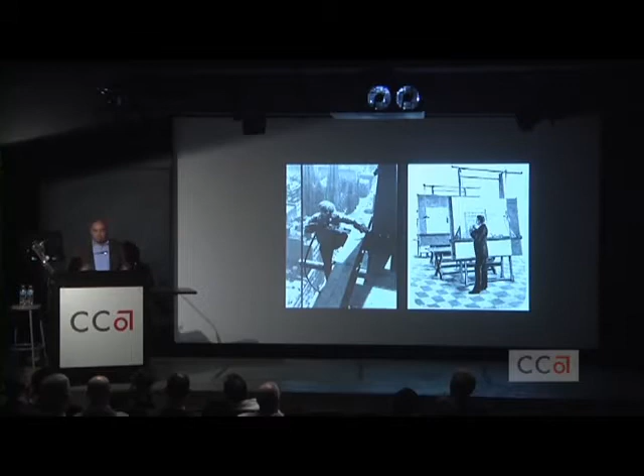This, of course, was not always the case. Throughout ancient and medieval history, most architectural design and construction was actually carried out by artisans, typically masons or carpenters. Until modern times, there was no clear distinction between an architect, a builder, or even an engineer. In fact, in Europe, those titles were mainly geographical variations that often described exactly the same person. And in fact, nowadays in Germany, where I worked and taught for many years, architecture students and engineering students actually graduate with the exact same title, Diplom-Ingenieur.

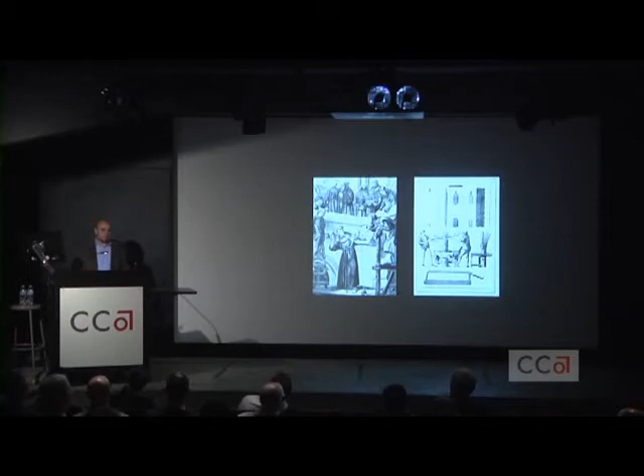So architecture students and engineering students can actually take classes with each other. I taught, for example, design studio to many structural engineering students. In the US, however, a typical architecture school will include within its programs architecture, interior design or interior architecture, landscape architecture, urban planning, but they will also distinguish themselves from other professions that have more to do with materiality, such as structural engineering or material science.

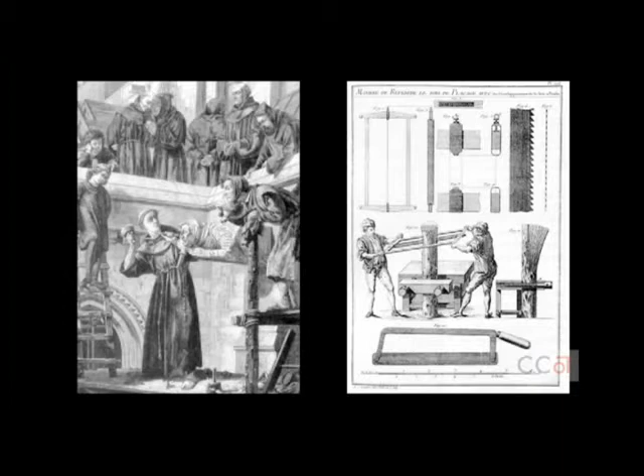I find it really interesting that when I came here a year ago, a little bit longer, I realized that here at CCA we have a lot of MFA students, sculpture students. We also have furniture design students. In their case, that clear distinction, that separation is not that strong. Because of scale, sculpture students and furniture design students actually have the chance to design by making. They design by being in direct contact with building materials, which I think gives them an advantage in the way they work.

After all, the word architect really comes from the Greek architekton, which really means chief builder. So it's not chief speculator or chief philosopher, it's really chief builder. At least that's what the name is supposed to mean.

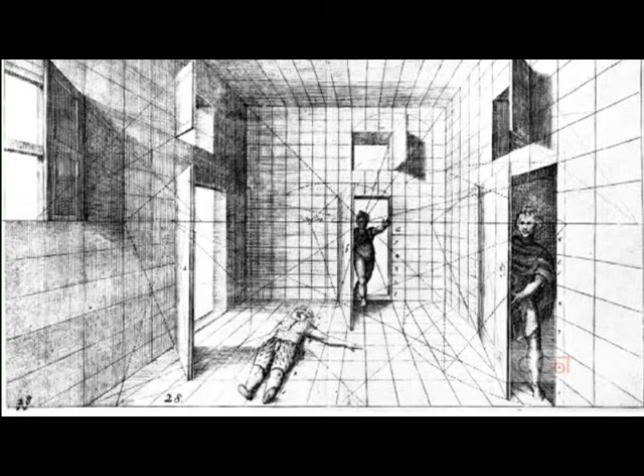So how did this distinction between a professional designer, an intellectual designer, versus somebody who's a craftsman, who is hands-on, come to be? Well, I'm not a historian, but it seems like people agree that various developments in technology, such as introduction of linear perspective, instruments for drawing, and the use of projection techniques to describe a three-dimensional object in two dimensions, allowed for this to happen. So all of a sudden, architects could spend their time just drawing and planning and speculating without necessarily ever having to interact with the physical world. And of course, this allowed the discipline of architecture to broaden up and include other concepts previously believed to belong to the realms of art, history, or philosophy, which is absolutely fantastic, don't get me wrong, it's truly liberating.

But I will argue that in architecture school and in architecture in general, some people tend to believe that technical questions can actually limit creative freedom. Some architecture students tend to think about technical issues such as structural stability, manufacturing processes, building materials, or detailing as problems that need to be solved after the main concept of a design is already established.

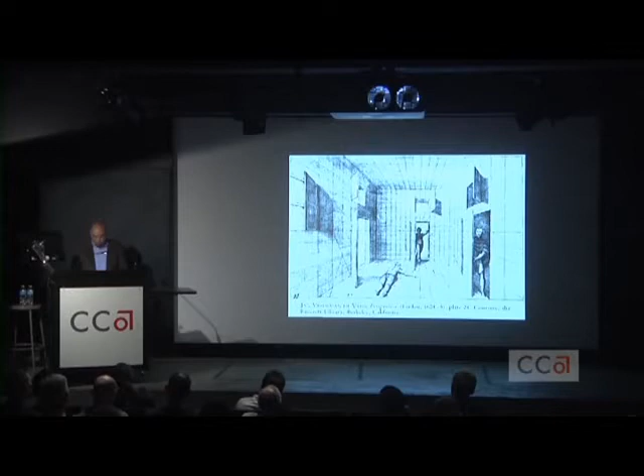So my teaching and professional philosophy is basically based on the premise that materiality and creativity do not have to be mutually exclusive, but should in fact support and reinforce each other. Understanding the potential and limitations of construction materials, being responsible for the structural stability of a design, and being familiar with contemporary manufacturing and installation processes are in themselves abundant sources of creativity, and should be an integral part of the design process.

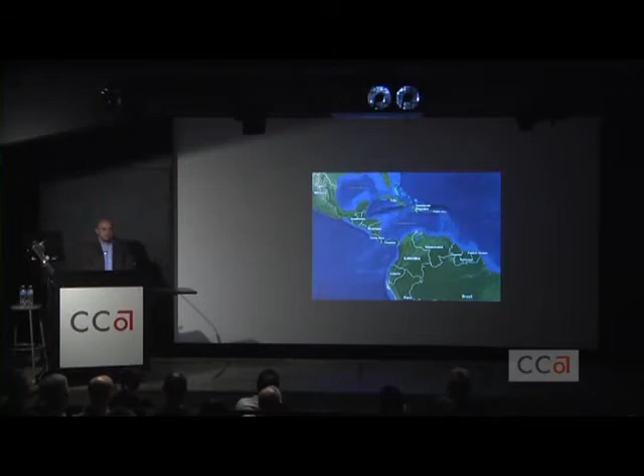So I have tried to explore all these issues in my career, all the way since I was a student, now as a professional architect and also as an educator. So the first project I want to show you is my undergrad thesis that I did already 15 years ago when I was back in Venezuela in 1999.

So I was born in a small city called Merida. I got these laser pointers so I can show you on the map. You have here Panama, Venezuela, Colombia, and the Andes, this big series of mountains going this way, all the way from Ecuador, Colombia, and then continuing. When the mountains get here, they're not that high, but still about 16,000, 15,000 feet.

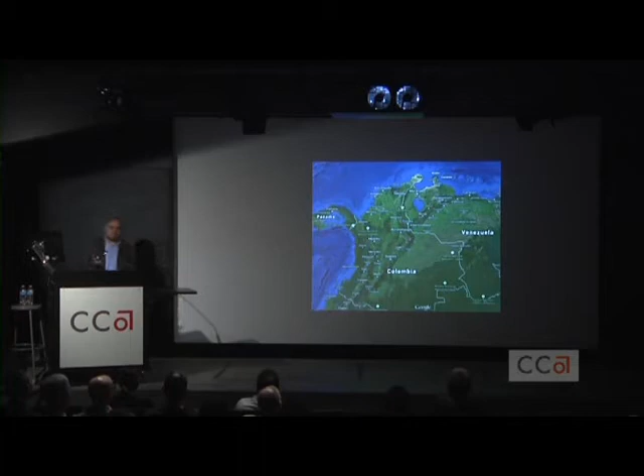There's only a couple of streets that go in this direction, and the university, where I went to undergrad, is in the north part of the city, while everybody lives in the south part. So the traffic jams are terrible.

At the time, the idea was to propose some kind of public transportation system. What was proposed was to use the valley of the Albarregas River to design some kind of high line or elevated train system, like a subway. So I decided to design one of the train stations, and that was my undergraduate thesis.

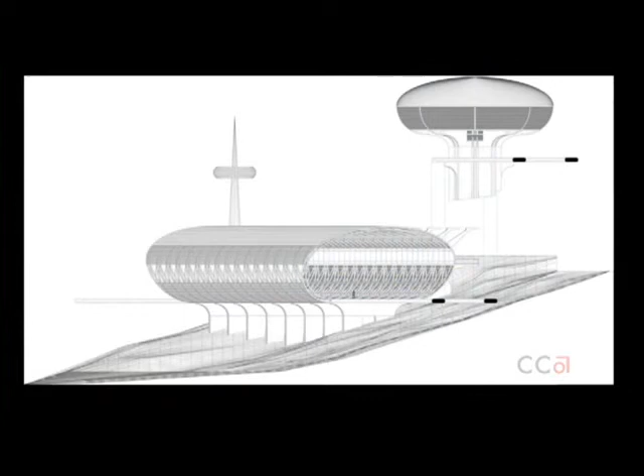It's very simple. It was basically a tube with a series of elements. This was basically a parking structure. And as you can see here, the quality of the space was based on the expression of the construction materials, on the expression of the structure.

At the time, back in 1999, Venezuela was a kind of world-class exporter of steel and aluminum, and it was thought that the extensive use of this building material could create in Venezuelans a sense of national pride and try to bring the economy up.

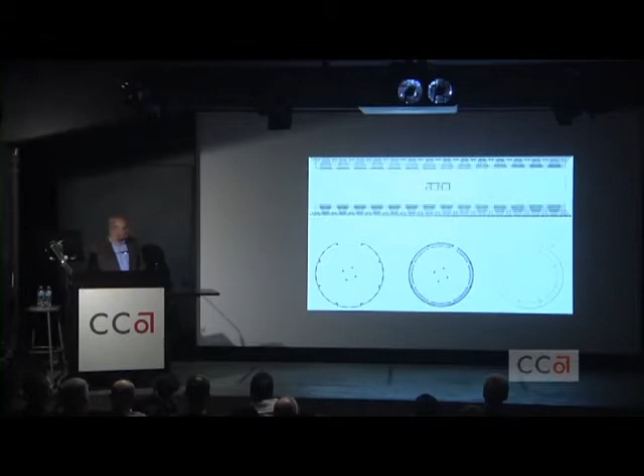Here we see an elevation and a section, and here a couple of plan views. This is the platform level, and as you can see, the rails depict one of these elevated magnetic train systems. So I was really pushing the technology aspect.

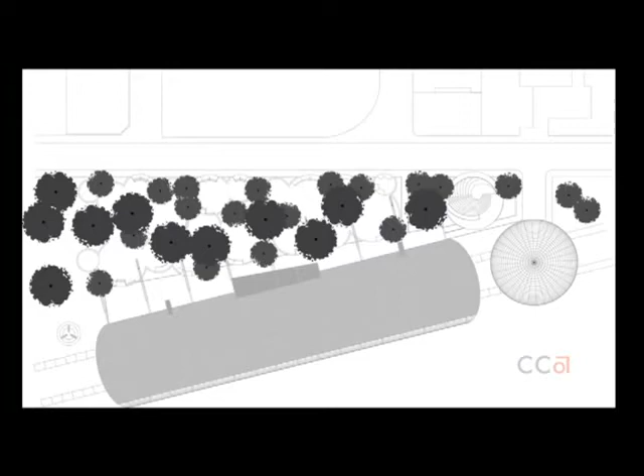Something that was very important for me is that the whole area, all the valley of the river, was extensively covered with a lot of tropical vegetation. So on plan view, this is basically the street level. It was important for me to separate the station from the street and map the position of every large tree, generating between the platform and the street a series of access piazzas that were also shaded by the local trees.

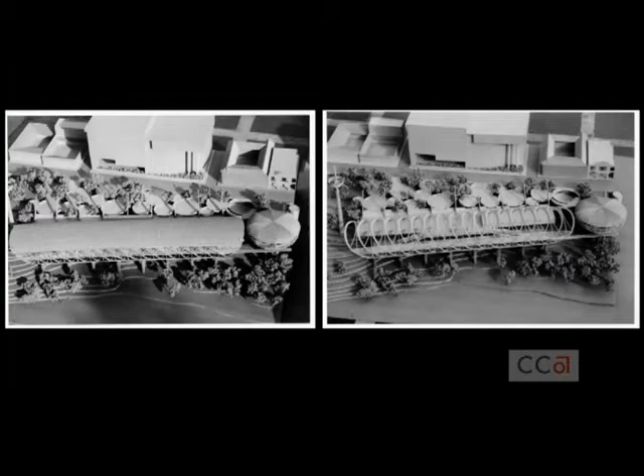So this is the physical model that I created. You can see the piazzas here and here. This was all done before laser cutters, so it took a long time to cut all of these pieces by hand.

In 1999, after graduation, I had the chance to work at a local tensile membrane structures and transformable structures office called Grupo Estrana, in Caracas. Before I went to pursue graduate studies at the University of Michigan, I decided to work there. One of the projects I was involved in was called the Estran module, a deployable structure designed to rapidly provide shelter to areas affected by natural disasters. That was the main idea.

And also exposition spaces, temporary deposits, outdoor gathering spaces, and any other space that required being rapidly covered or protected. The whole thing weighed about 2,000 pounds. It was made of aluminum and covered an area of about 2,100 square feet. The nice thing is when it was closed, when it was collapsed, the dimensions were about

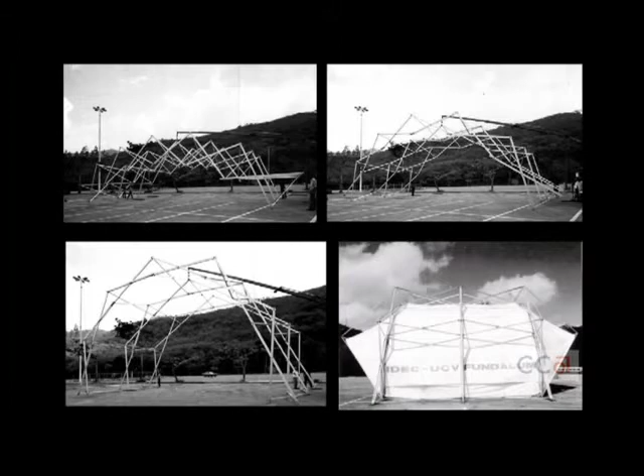And then once it's locked into position, the membrane is installed. So we did this and we realized, well, this is great, but if this structure is supposed to be servicing remote areas after, let's say, an earthquake or something like this, the question is, well, what if you cannot get the crane in? So what we did is we designed a very simple kind of a series of skates with wheels, to basically be able to hopefully install this thing without any cranes.

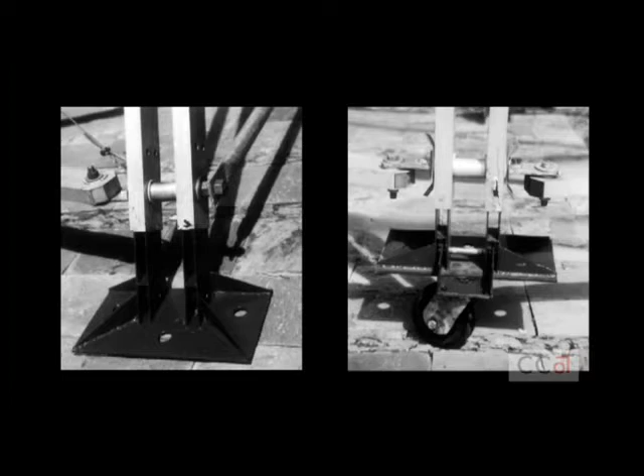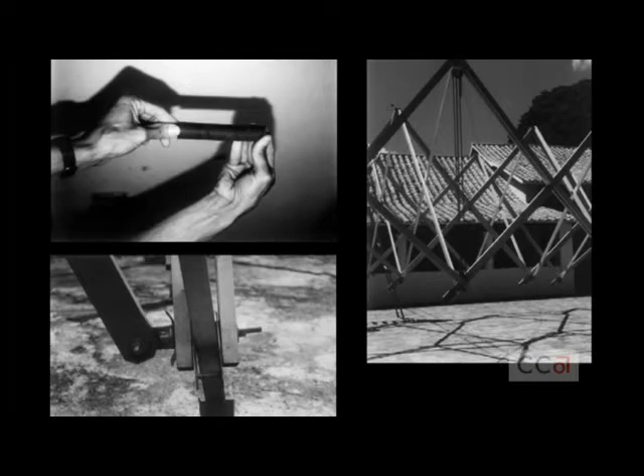So of course what that meant is that talking about tolerances, in my classes we always talk about these issues, and we had a galvanized high strength steel covered with rubber going here to allow for these members to actually wiggle here and there. And we installed also a chain block inside to be able to try to open the whole structure by pulling the 2 middle points together.

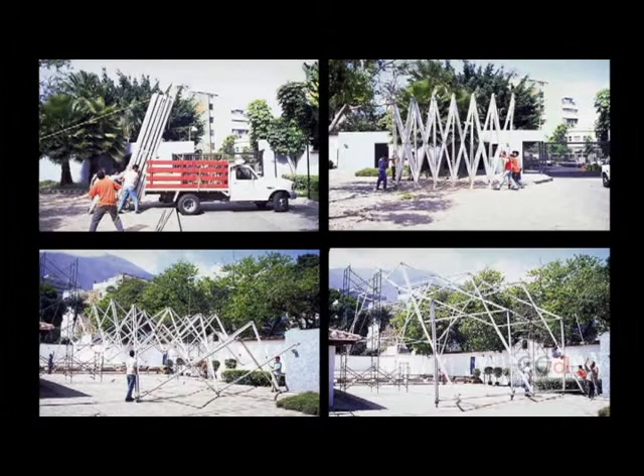And then we went for it. So this was basically a tryout to install this thing without a crane, and it really worked. Again, there was one point between this and this where the structure was really unstable, so we had to be careful. It fell a couple of times, I have to admit, and a couple of these elements actually did break. But to me, it was a really, really interesting experience.

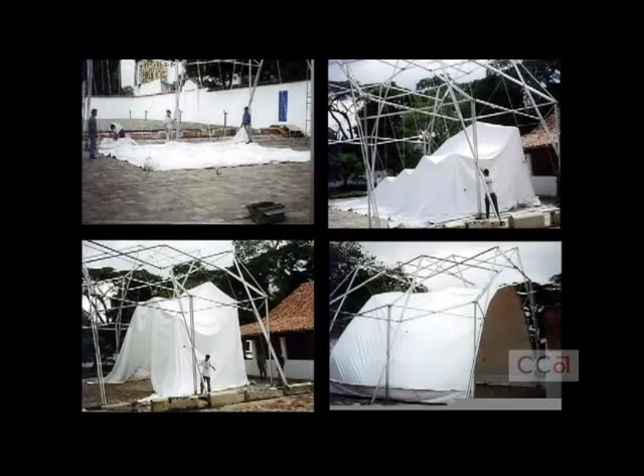Now, I have to admit, when we installed this whole thing, it took us like 2 days to put this thing together. And in about 2 hours, when we went there, another architecture office came to site and installed a set of really boring square section tents, a couple of tents that you see, I don't know, like when they're selling beer on the street or whatever. And so I was scratching my head, thinking, we've been 2 days here installing the rapidly deployable structure, and these guys just came and put this whole thing together.

So I was asking myself, well, is this really just some kind of technology fetish? Are we really in love with technology so much that we don't really see the big picture? Is this really a good design that is usable and practical, or is it just for ourselves, for our own kind of intellectual amusement? Now, 15 years later, or 10 years later, whatever, I like to think that architecture is there not necessarily to just solve problems, but also to somehow captivate our imagination. So I tend not to think too much about it. How does architecture look when all it does is solve problems? So that's what I tell my students—if they want to do something like this, that's perfectly fine.

So after completing my master's in architecture at the University of Michigan, I was still very interested in this issue of tensile membrane structures and lightweight structures in general, and I took a job in the southwest of England in a company called Architen Landrell.

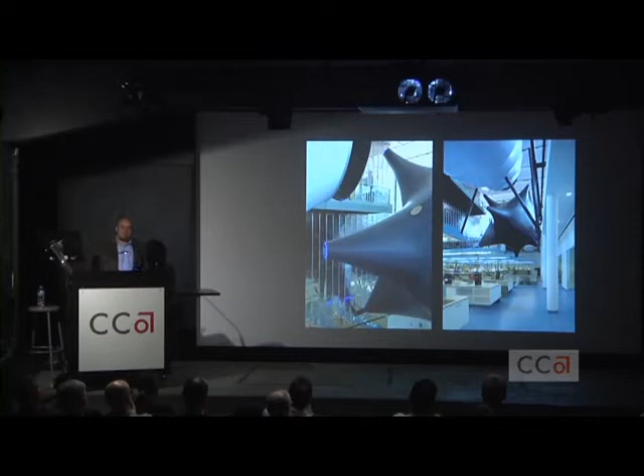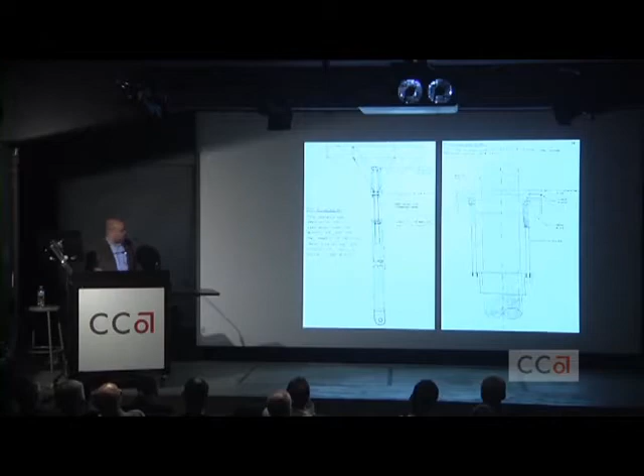Now, this looks like a really sophisticated, high-tech project, but I find it really interesting that the design was actually done in a very conventional manner. These slides are basically just scans from my own sketchbook in which we had to come up with all the construction details. For example, in this case, we have a push-up mast, with some nut welded here, and a head ring and so on. And this is, for example, on the other side, we see one of the steel clamps that grabs one of those huge steel legs, and the membrane is basically clamped here and pre-stressed by one of these threaded bars.

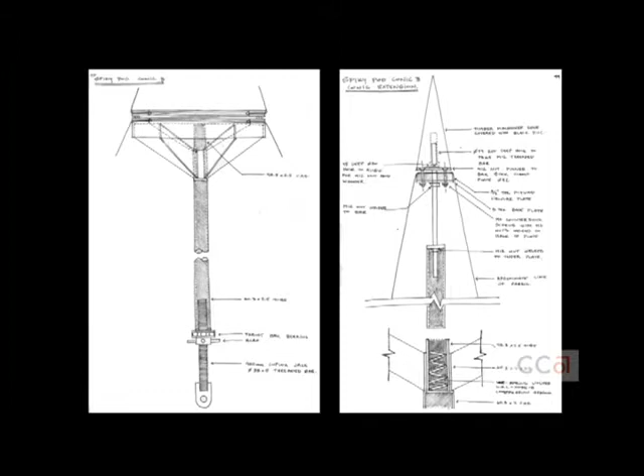So the drawings were actually, the design was done in a very low-tech fashion. This is the inside view after the whole project was ready.

The Alsop and Partner team also wanted to have these blue LEDs going here, which I personally totally hated. This meant that we actually had to take electric cables going all the way up, and they also wanted these kind of submarine windows, so we had to clamp the membrane after it was pre-stressed, cut the holes, and put them in.

So from the technical point of view, it was a really challenging project, but it was also really, really interesting for me as a young architect to be involved with. The membrane, as you can see, is silver from the inside, and then it was black on the outside.

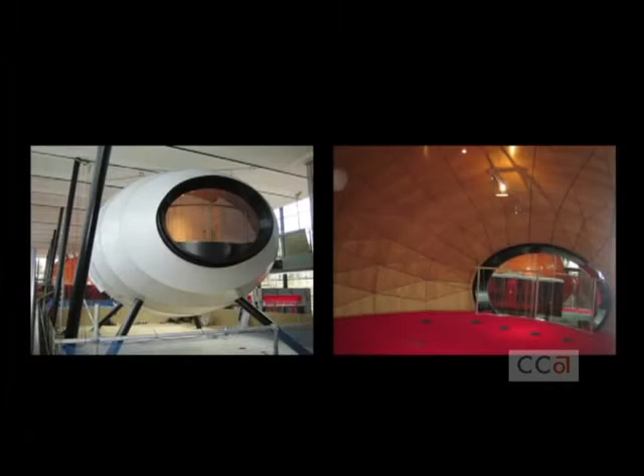Next to the spiky pod, we built what we called the cloud pod. Formally, at least on the outside, it wasn't as challenging or interesting as the spiky pod. It was basically a series of steel rings with membrane spanned between them. The inside, however, was a different story. At that time, this was, I think, 2004.

We tried to come up with a strategy to install all those cladding panels inside the geometry. But because of tolerances in the steel manufacturing and installation, because of our inability to be precise enough, we tried 3 times and failed to install these things. So at the end, we had to take the table saw inside the space and individually cut and install every single panel. It's about finding a way to meet deadlines within a specific project, given the limitations of a specific construction system.

In 2005, moving forward, I ended up moving to Germany, to Stuttgart, and I took a job in a company called SL Rasch, which means Special and Lightweight Structures. Bodo Rasch is a student of Frei Otto, and he founded this company about 30 years ago.

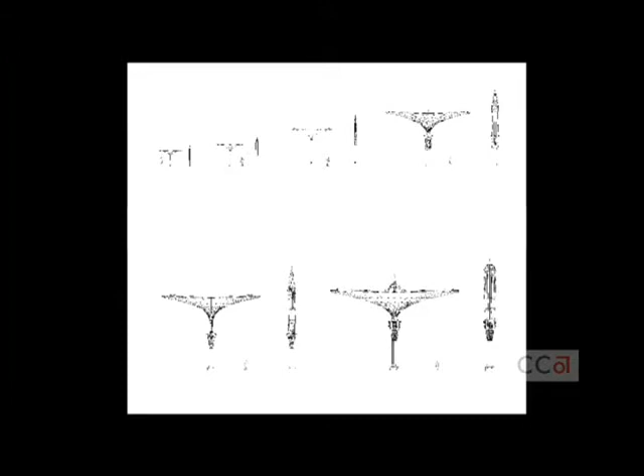His office became relatively famous, at least in Germany, for the design of umbrellas, deployable umbrellas. These umbrellas range in size from 10 feet to 100 feet. All of them are square sections, so every side is 10 to 100 feet, especially in the Middle East.

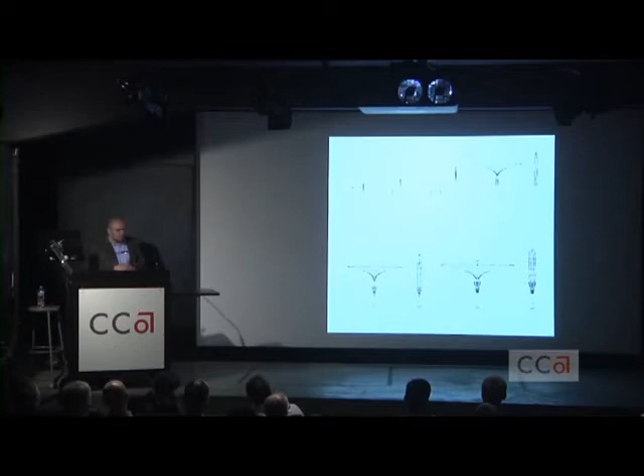The breakthrough project in this company was the design and installation of the courtyard umbrellas in Medina 20 years ago. These are basically a series of umbrellas, two sets of nine, designed to protect the pilgrims in Medina during the day against the sun. At night, it also somehow encloses the space and keeps the temperature from dropping.

What I find really special about this project is that in the West, we tend to disregard ornament. Ornament is something that we as a culture don't want to deal with. In this office, we found that in the Middle East, this is completely different. They didn't really go through the modern movement, so for them, ornament is still perfectly valid.

In our case, we used the patches, the reinforcing patches where the membrane stresses go high, the seams of the membrane, and the belts that take the forces on the sides. Those are absolutely necessary—you couldn't build this thing without them—but they become the ornament layout of the whole design. So they're both somehow ornament, but also completely necessary.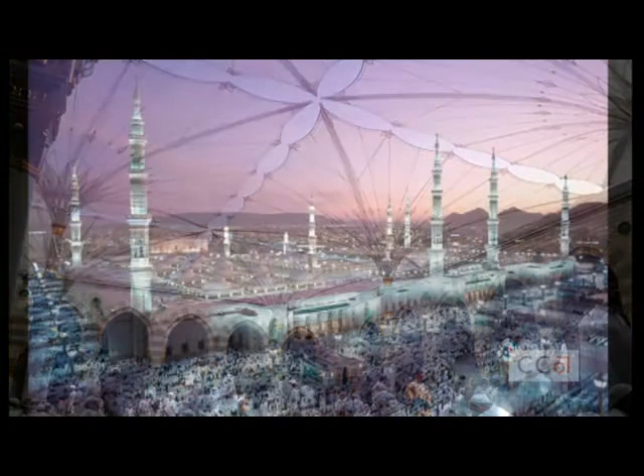The project I wanted to talk about today is the umbrellas not for the mosque courtyards, but a series built outside the mosque courtyard. This is a really big courtyard, about 1.5 million square feet. What we did is design 260 umbrellas. Every side of the umbrella is about 26 meters in diameter.

There are basically two heights. When the umbrella is closed, they all have the same height, but when they open, they have different heights so that they overlap, which was an improvement from the previous project. And when they close, they match the height of the facade of the mosque.

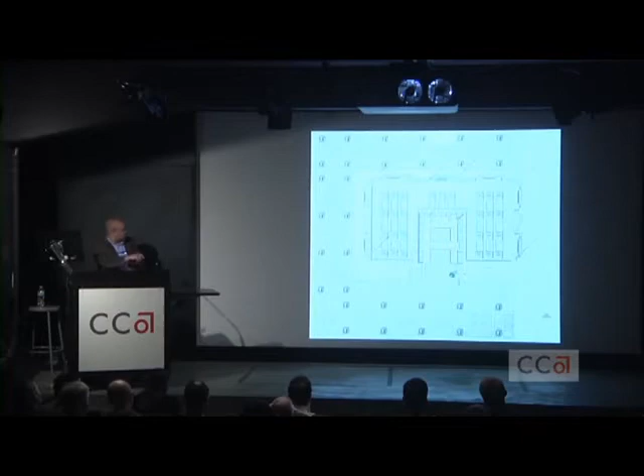The whole idea of the project is to protect the pilgrims from the sun around the mosque. This is a plan of the whole mosque, where you can see the old umbrellas here and here. The new project added 260 umbrellas that could be deployed individually—every umbrella, or every sector, could be opened and closed independently.

You can see what it's all about—we're talking about 120 degrees in the summer, and the second we install the first umbrella, that's where people go and sit, in the shadow. It was interesting because these lights were also designed by the same company, and apparently when they installed the original light, people were sitting along the shadow of that post, of that individual mast. So the umbrella was a huge improvement. This is the size, the facade, let's say, of the umbrella.

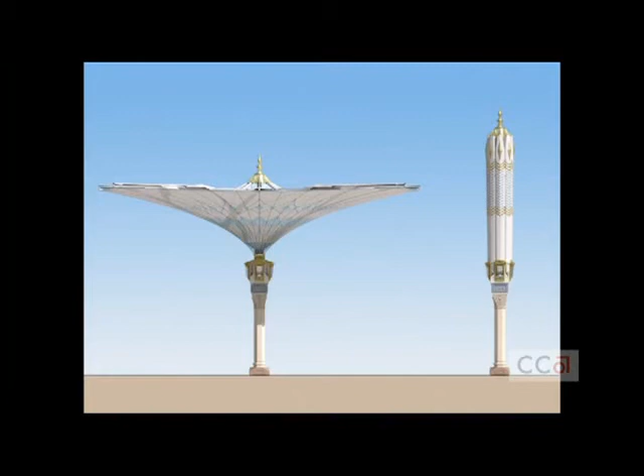It was built in collaboration with a German crane company called Liebherr, which I've seen many cranes from in the US as well. When the umbrella was closed, they all had the same height, but when they opened, they were actually overlapping. This is a series of pictures showing how this thing opens and closes. You can see the umbrella being held by cables here, so that it doesn't hang and get trapped by the cladding of the arms.

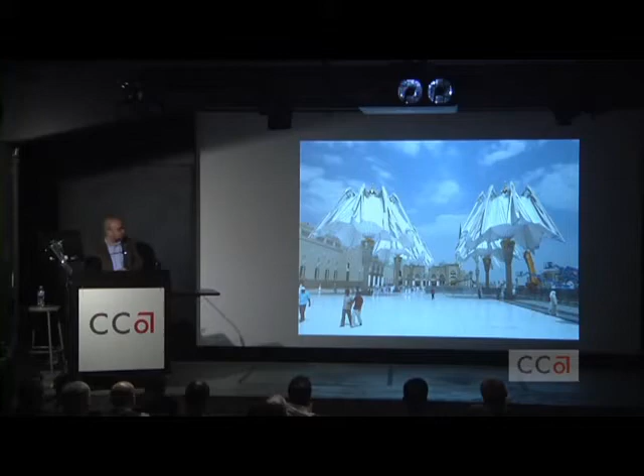It continues to open, puts more tension, and then it's pre-stressed. So it was a beautiful design, I will argue, and you can see this is the only kind of corner open to the space.

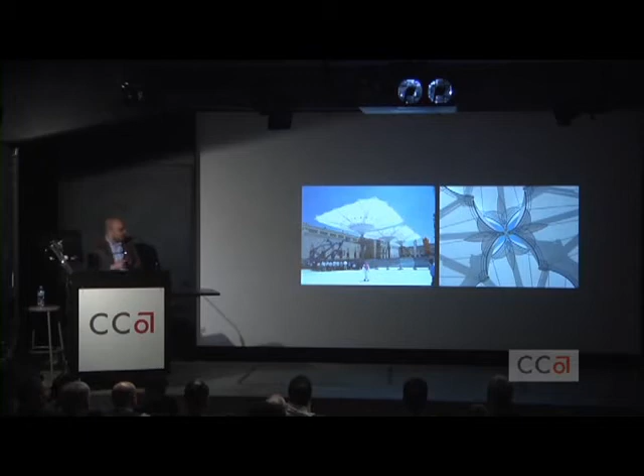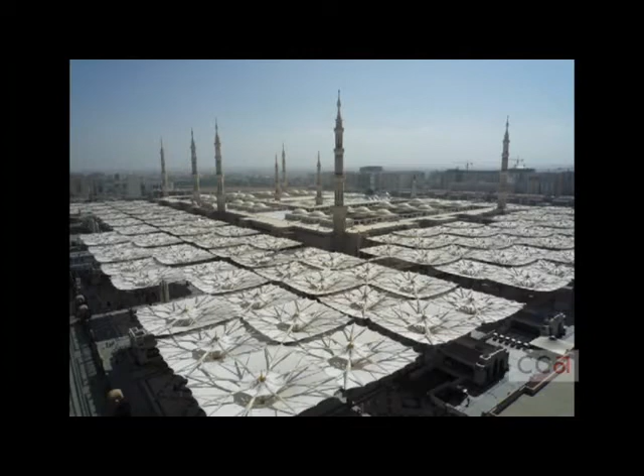We see the entire umbrella. Every umbrella cost about 2 million euros, so it's like 3 million per umbrella.

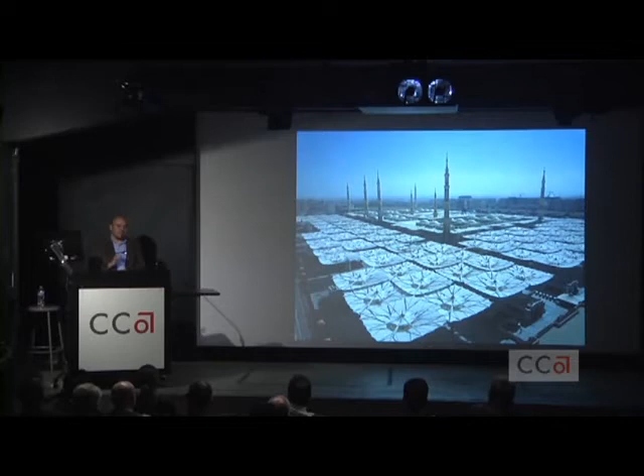Now what's interesting is the inside knowledge: this was a really long design process, the whole project took like 6 years. At the time, this was the same time the bird's nest was being built in China for the Olympics, so there was basically no steel in the world. We put in an order to build these things, and the waiting time was like 2 years. So my boss actually traveled to India and secured a series of pipes, then changed the design and sold the pipes to his client. Just in that transaction, I can only imagine how many millions he made just reselling steel.

Yeah, but that's business. That's how it works.

It doesn't really rain that much in Saudi Arabia, but when it rains, it's unbelievably hard—it rains for like 3 days a year, but it really rains a lot. So the umbrellas are also there to collect water. Rainwater gets collected here and dropped down, and there's an inside gutter, and the water is actually saved underneath.

We have basically what we call the diagonal arms, the central arms, and these are what we call passive arms. The main arms are mechanized. They fold twice, so this is not just a simple umbrella folding that way—it actually folds in that way. The whole idea was that you can cover a lot of area without having an umbrella that is really tall.

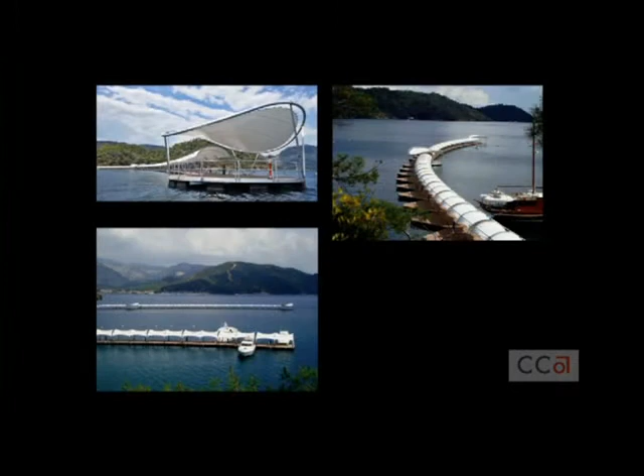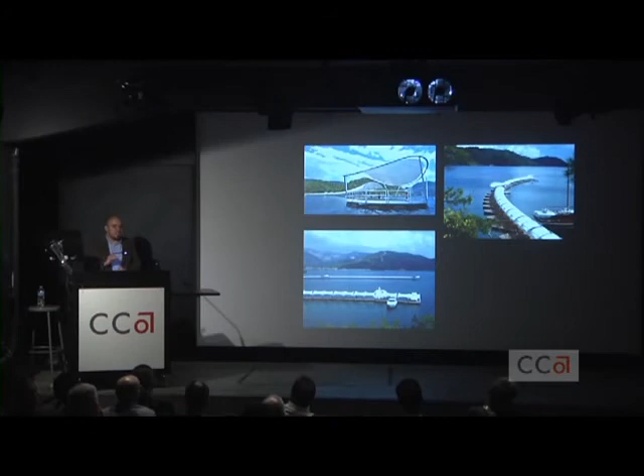As David mentioned, in 2005 I opened my own small architecture office called the Studio for Lightweight Design, or Studio LD, and we had the chance to do a couple of projects just before I came here. The first project was the Puruklu floating marinas in Turkey, done in collaboration with a Canadian company called Structures Marine, which specializes in the design and fabrication of floating marinas—that's all they do. But they had this high-profile project, actually 2 projects, in Turkey.

They contacted us to design a system that allows them to cover these floating marinas. The challenge was to design a structure that could take a deflection of plus minus 3 feet—you can imagine waves up to 3 feet deflecting all of this. So we had to design a geometry that allowed these arches not to collide with each other, and the whole roof to be as flexible as the floating marinas. We came up with a design we call the flexi block, basically a brick made out of rubber with a steel plate inside that allowed all these elements to move and still be firmly secure, but able to move up and down.

The flexi block is basically always connected at the bottom of these extrusions. What we did is we designed the entire thing using the construction materials that this company produced, so the entire floating marina was aluminum extrusions, basically the whole thing. We used the same profiles they had to create these arches, and then spanned a polyester PVC membrane between the arches. There are actually a couple of details, and when I see this picture I cannot avoid looking at them, but I'm not going to tell you what they are.

So another project that was really interesting was 4 years ago already. The architecture office called Helen and Hard won a competition to design the Norway Pavilion in the Expo 2010 in Shanghai. These are renderings from the architecture office. Their idea was to represent the forest that they have in Norway, and to create a pavilion that was really luminous.

So they had the idea of a series of translucent roofs that collected water, and solar panels on top and so on. They also had this fantastic idea, and I think some people argued that's the reason why they won the competition, that it was basically thinking about what to do with the pavilion after the expo was over.

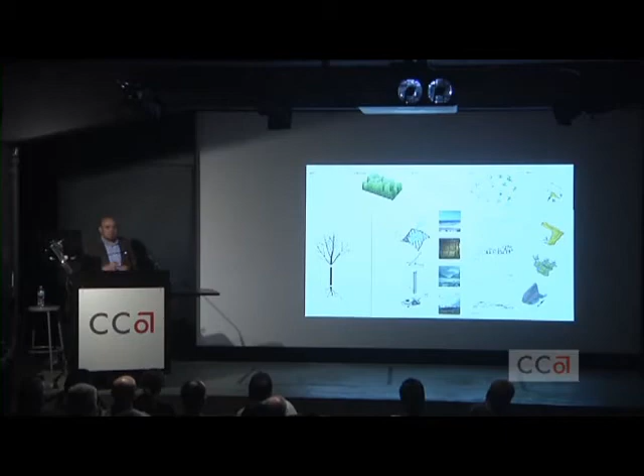Typically, in a universal exposition, all buildings either stay there and get reused - so the expo pavilion of a particular country becomes an embassy or an office building. But a lot of the more lightweight structures get destroyed. So what they proposed was to have all of these trees together, and then a year later, in 2011, to disassemble all the trees and send them around the world as gifts.

So the idea was that we in San Francisco would have had a tree from the Expo 2010 Norway Pavilion. As you can imagine, in Norway they have a lot of high-tech technology in terms of wood, so all those trees were glulam structures. They had solar trees, an air tree, water trees, and a whole series of sophisticated abstractions and ideas about what they wanted to build.

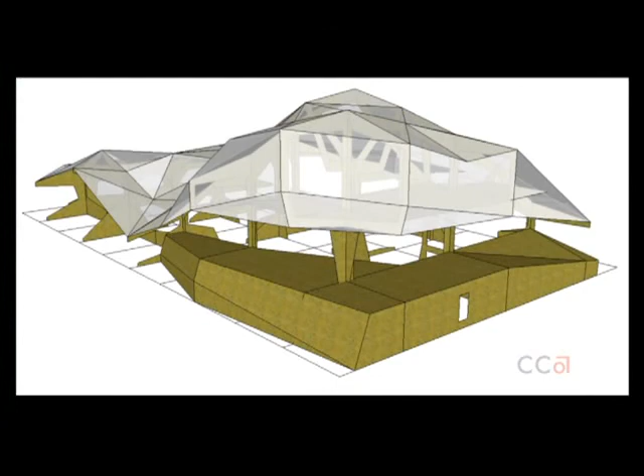This is basically a rendering of the roof. So we told them, why don't you use a membrane structure for the roof? We talked to Jan Knippers, a professor at the University of Stuttgart who had a larger office and was able to put us under their insurance umbrella. So we worked directly with Helen and Hard through the company called Knippers Helbig.

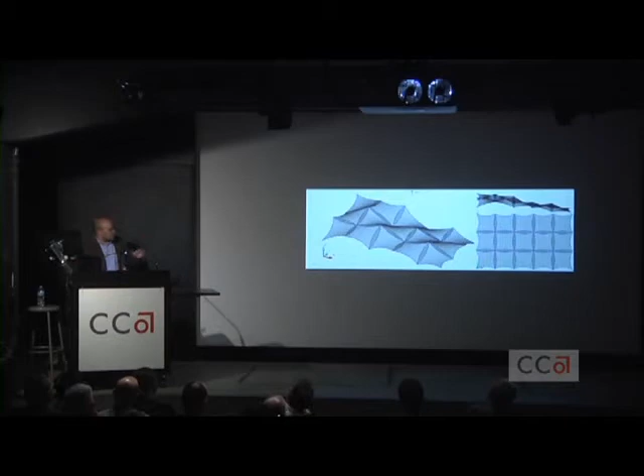In any case, we did a form finding in Rhino membrane, which my students from my tensile membrane structure seminar know really well by now. So we did a digital form finding of the membrane and basically gave it to the architects, and they loved it. They said, now we can still follow the same idea - this will be in New York or Chicago or Helsinki, and this will be a tree.

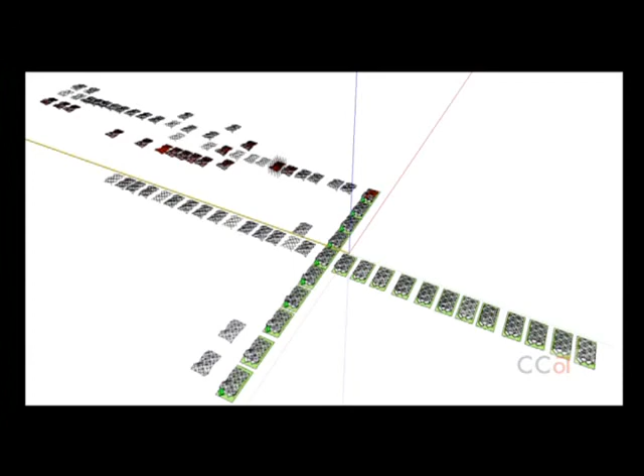These are basically all the different revisions that the 3D model went through when we joined the team, showing all the different variations. Every time a tree changed, we had to do another form finding technique, and the membrane had to change - we did a couple of hundred revisions until we all agreed it was fine. So the glulam trees were prefabricated in Norway and sent to China.

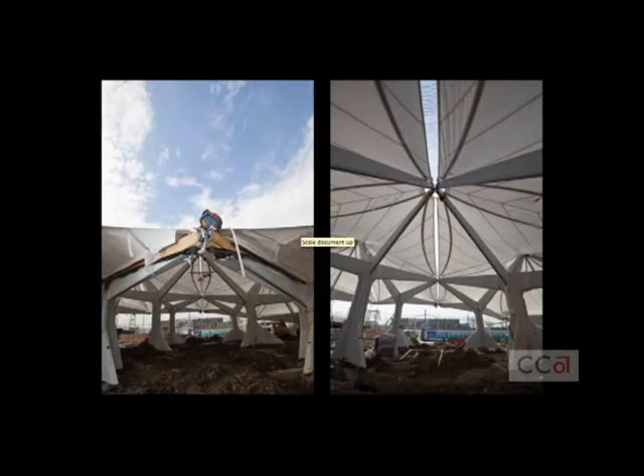We also did the installation - we basically moved over there and supervised it. You can see the trees are actually white because they're protected in plastic against scratching. For us, it was a really interesting design because we had to come up with a series of individual members - this is basically what we call an erection joint.

It's there because the pieces of membrane are too big to be installed in one single go. But the idea was that this, what we call the 4-point cell, was able to remain intact after the exposition was over. So the idea was to basically cut all of this extra membrane right after, and send every individual tree someplace else.

And this is how important it becomes to really get yourself as a designer, as an architect, familiar with the behavioral properties of construction materials. After this was over, the people installing the flat screens inside the pavilion realized that there was too much light coming into this material. This is a material that is 10 times more expensive than the standard polyester PVC - it's a pure coated Teflon.

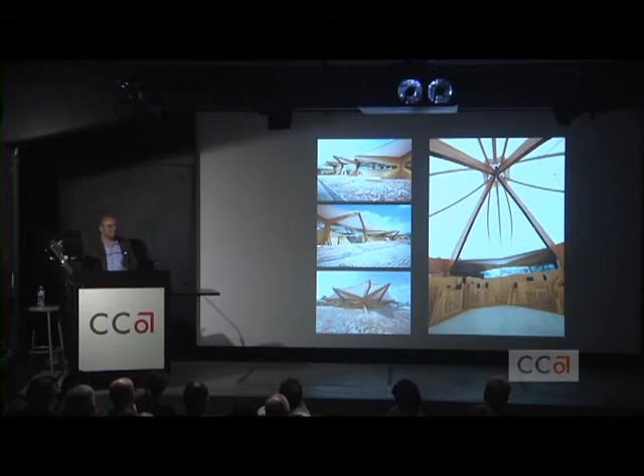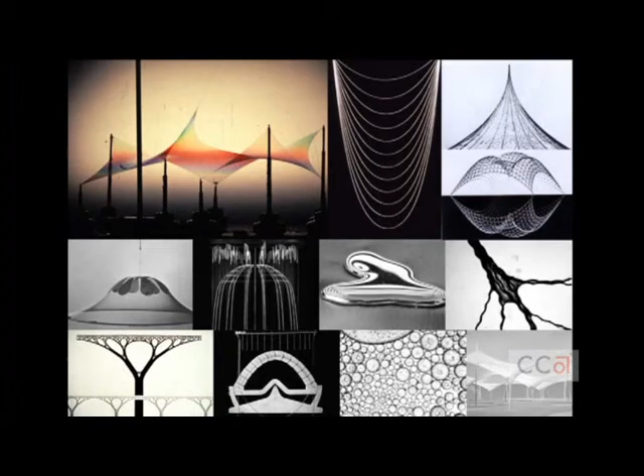So in 2005, I also got the opportunity to teach architecture at the University of Stuttgart. Since the 60s, the University of Stuttgart has been a hot spot for the design of lightweight and tensile membrane structures. This is a field in which the behavioral properties of building materials often reinforce the conceptual basis of a project, so form, materiality, and structural performance are linked together.

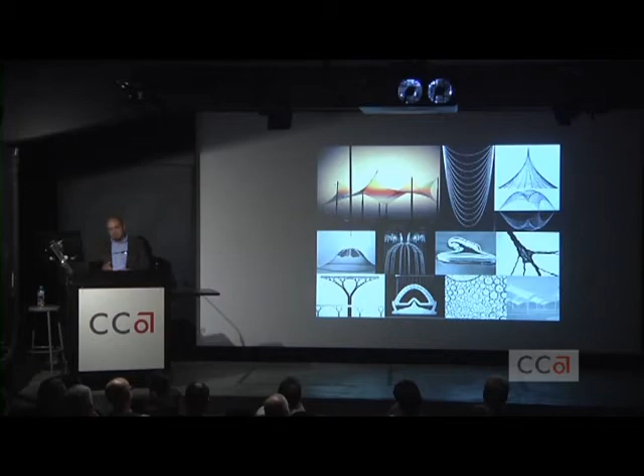These pictures you might have seen before show a series of form-finding techniques developed by the Institute of Lightweight Structures in the 60s by Frei Otto. That institute is now called the ILEK - before it was the IL, now it's the ILEK, and the new professor is Werner Sobek, who's also famous. The idea behind these models was to learn from nature and try to comprehend the performance of a structural system.

And to develop a construction logic that links material, form, and structural performance, with the idea of saving material and designing something light and beautiful at the same time. So a project I wanted to show that, from my point of view, was one of the most successful projects I've seen.

It was actually designed and built at the university campus by Jan Knippers from the Institute of Structures, the ITKE, and Achim Menges from the Institute of Computational Design, and a big team of people including Moritz Fleischmann and Julian Lienhard, who I believe is coming next summer to teach in the 333 studio, and Simon Schleicher, who was the project manager, and a series of other people.

This was a research pavilion that was developed in two phases. In the first phase, we asked our students to work with plywood and said, well, what can you do with it? The concept was to explore the potential and discover the limitations of a building material, and use that as the conceptual basis of your design.

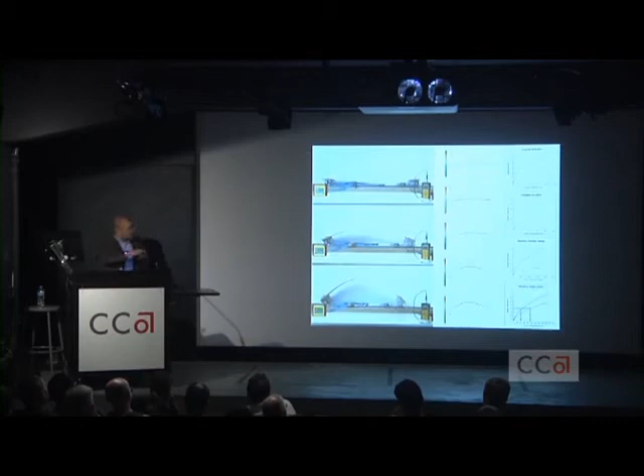So the next semester, at the university, we used 6 millimeter thick plywood that was bent, and these elements measure not only how much pre-stress is present but also the moment at the base, the reaction forces. With that, a computer model was created to look into the structural performance of the pavilion.

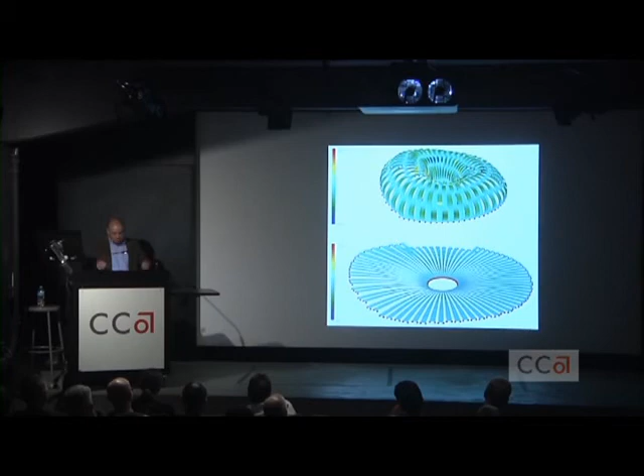The whole thing was also done parametrically. The team at the Institute for Computational Design varied the number of strips inside the model - how many plywood strips, and also the geometry of the base, whether it was circular or more like a flower arrangement. All the individual pieces were not only fully detailed but also analyzed structurally.

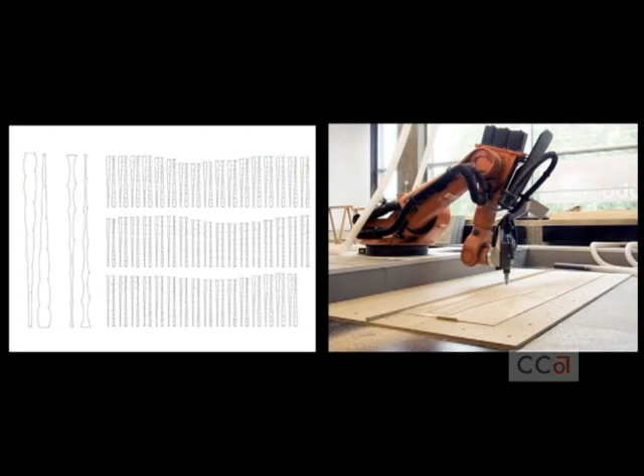What's interesting is the team actually used the robotic arm at the University of Stuttgart to cut all the pieces, which facilitated the erection of this pavilion, because if we had to cut all of these pieces by hand, it would have taken a long time.

Now, from my point of view, that's actually not that interesting. What is interesting, however, is the fact that we as architects, with the development of new digital fabrication techniques, are now reclaiming the manufacturing process.

We're taking control of a project beyond, let's say, the completion of construction documents. So all of a sudden, an architect potentially doesn't need a contractor anymore. He can actually take control over the entire design, manufacturing, and installation process, which I think is truly fascinating, because it's somehow bringing back materiality into the realm of architecture.

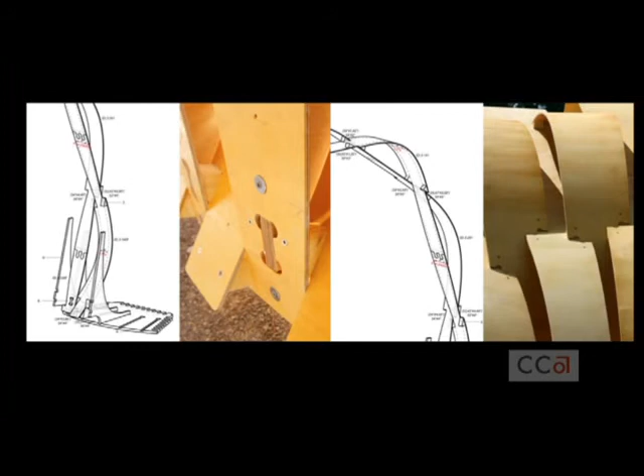A series of projects, pictures of the construction details. This project won what I think was called the Mies van der Rohe Design Prize in Stuttgart, which is a big deal, and also the Detail Magazine Prize. So it was published everywhere, I'm sure you've seen it. It was designed through a collaboration between Achim Menges and Jan Knippers from the Institute of Computational Design and the Institute of Structures. These are our students putting this thing together.

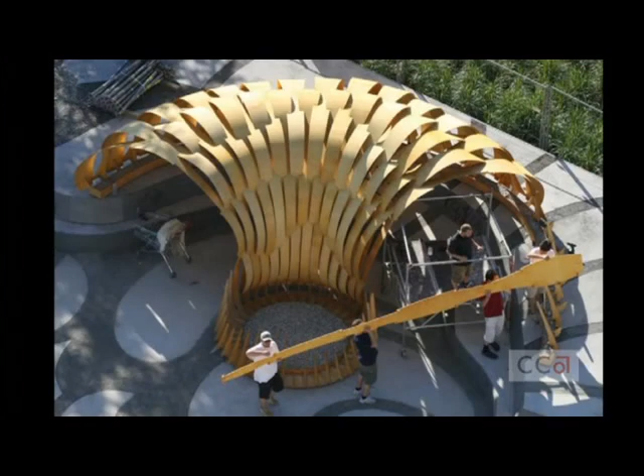This is not a model, this is a real picture of the whole thing. The pavilion was actually intended to be there for a whole year. But then winter came, and this is open space, so people were really afraid - nobody had actually tested how much structural integrity was left after the plywood was exposed to the weather for so long, with a lot of snow on it. So people at the university were a little nervous, and they decided to dismantle it before the winter came.

But I think from my point of view it was a super successful project, because it really took into account the behavioral properties of a construction material as a starting point, as something that really reinforces the concept of a proposal. So I've been trying to talk to my students about my teaching philosophy.

I just wanted to show you really quickly a couple of design studios that I ran at the University of Stuttgart. These shouldn't take too long. So the first one is the Paris-Dakar camp.

So these are basically designs by a couple of my students, talking about lightweight structures and using the cars as a means of installing the whole thing. This was another proposal. The installation process becomes also super important. This is the physical model, and of course, all the detail.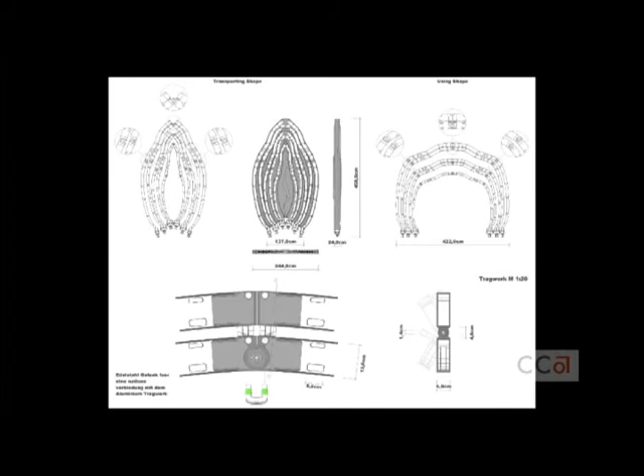This is also something that we do here at the California College of the Arts in our comprehensive building design studios - to try to prove to our students that you can be responsible, looking into all the construction systems and all the materials and all the details of a proposal, and at the same time be creative, think outside the box.

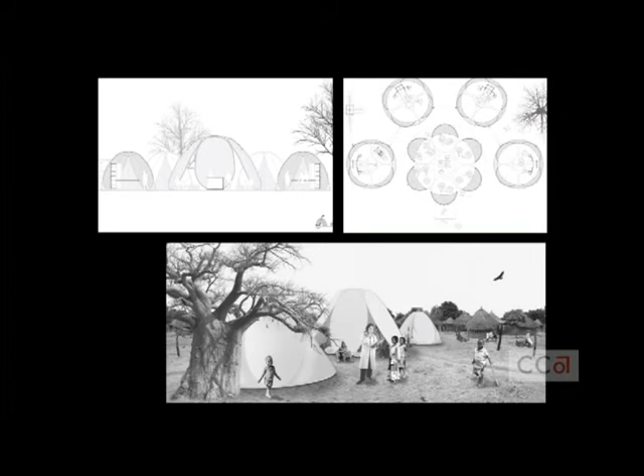So, a mobile health clinic. In Africa, there are some villages that are about two days away from medical facilities. Nowadays you have a series of ambulances that drive between these villages, but these ambulances don't have any resources or infrastructure attached to them. So we said, well, what if we had to design a camp - a mobile health clinic that had to be moved every so often from village to village? These are basically proposals from our students.

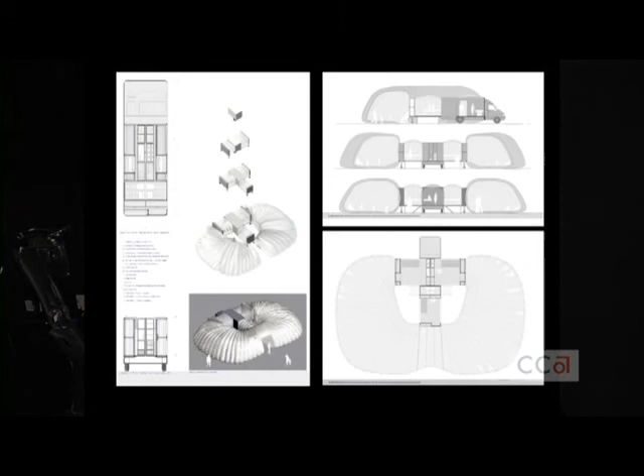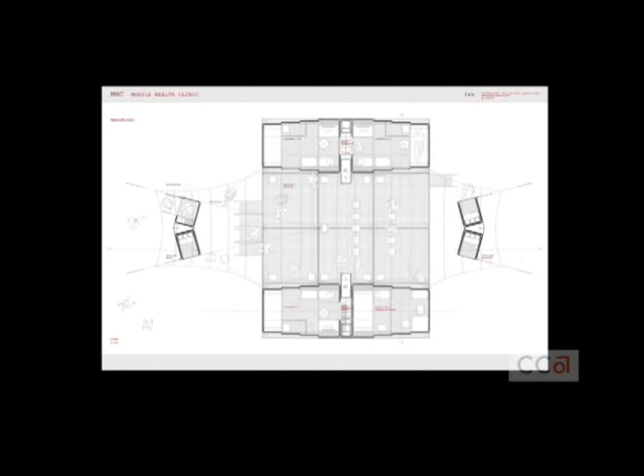This one, for example, was a deployable, inflatable structure that was packed inside the ambulance, and it surrounded it. A couple of other projects - this one worked like an accordion and had a tensile membrane structure on top. So talking about the stability of the construction and going a bit more in detail about what exactly it means to propose a project like this.

Another one was called the Arctic Lab. As you probably know, a couple of years ago in Svalbard - I don't know how to pronounce that, I'm sorry - in Norway, there's an island, and they actually built a seed bank buried inside a mountain. Inside the mountain they have a series of chambers in which they now collect and store all the seeds used in agriculture around the world. The idea behind it is to basically guarantee genetic diversity.

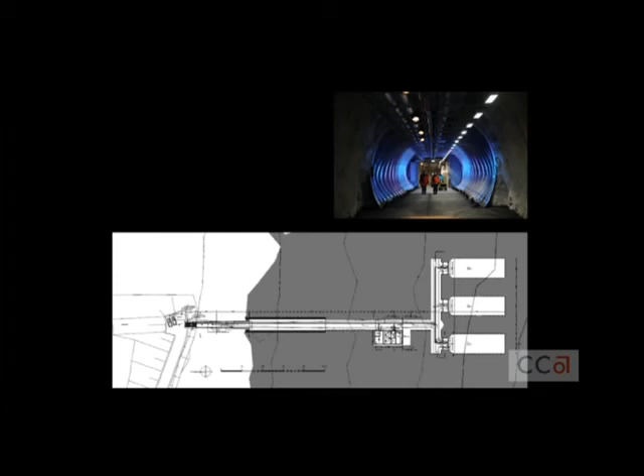With climate change, droughts, floodings, diseases, whatever, we tend to always cultivate the same kind of crops. So we still have at our disposal a higher diversity in terms of genetics if we need it. So I asked my students, what if we have to have a lab that can test these things? The idea was to get them to think about prefabricated systems, how you assemble something together, how you bring it to a remote location, and also how to responsibly design a building that takes care of a really cold environment.

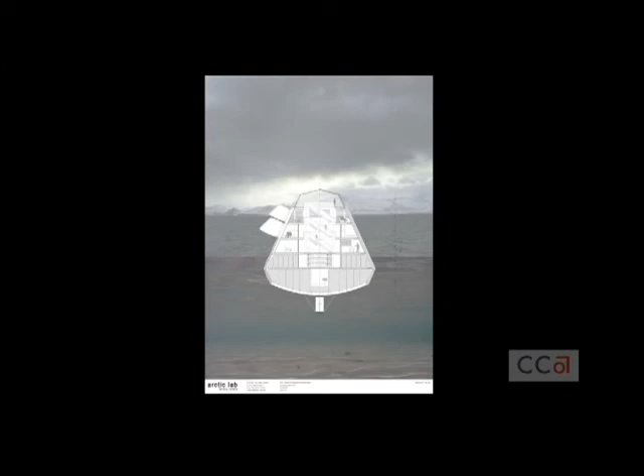So this student of mine designed a floating kind of buoy. There was an entire building, and these are the plan drawings. The idea was that in the winter, frozen water was actually warmer than the air temperature, so he was sinking the whole building in the sea to insulate against the cold. I thought it was really creative.

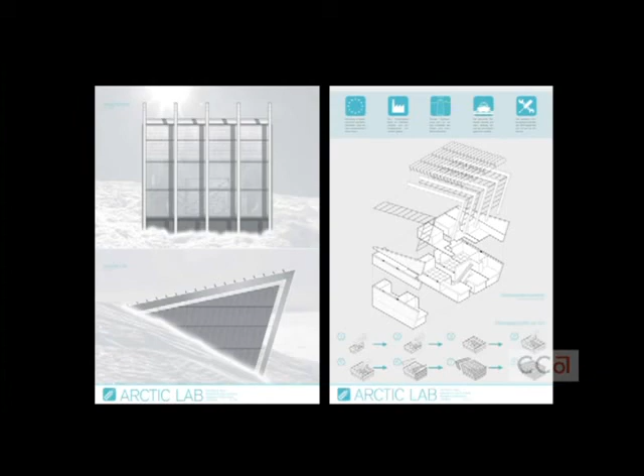Another student, more conventionally, was thinking about the maximum size of a prefabricated element to be shipped inside a shipping container and installed there. So she designed this little building and developed all the construction details and so on.

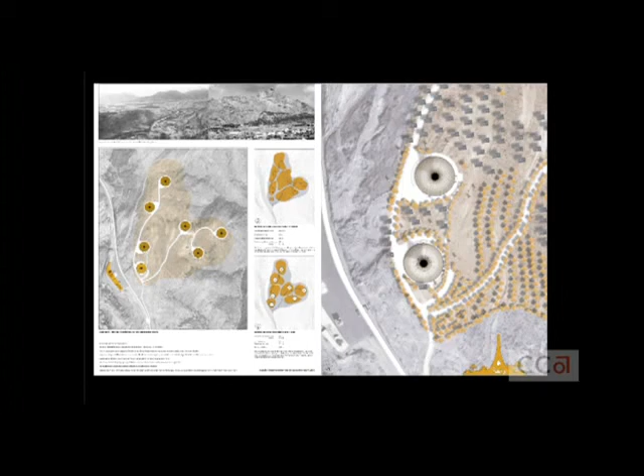The last project I wanted to show is again in a very remote location, in the desert in Saudi Arabia. It was a station that explored the potential of a building to actually produce food in the middle of the desert. This is something similar to what my students are doing right now in my comprehensive building design studio. So a series of buildings: this one was for production of wheat, and this one was for living. Here are some renderings and a couple of views.

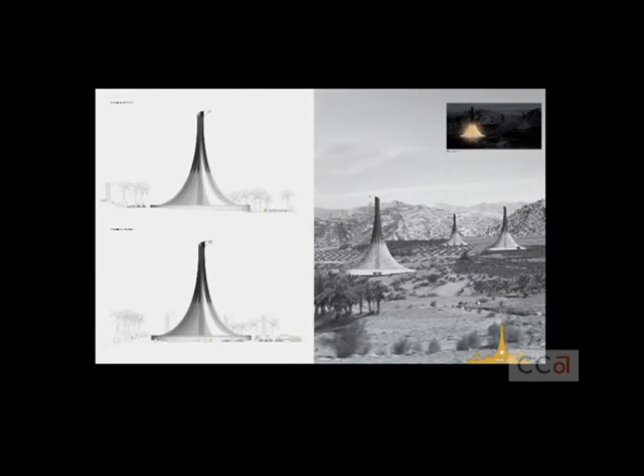Because first of all, it asks students to work in scale 1-to-1. So these are not abstractions, these are not models, they are autonomous pieces all by themselves. Students have to basically control the project all the way from an initial sketch to a final erection. They work in scale 1-to-1, and they work in direct contact with real building materials.

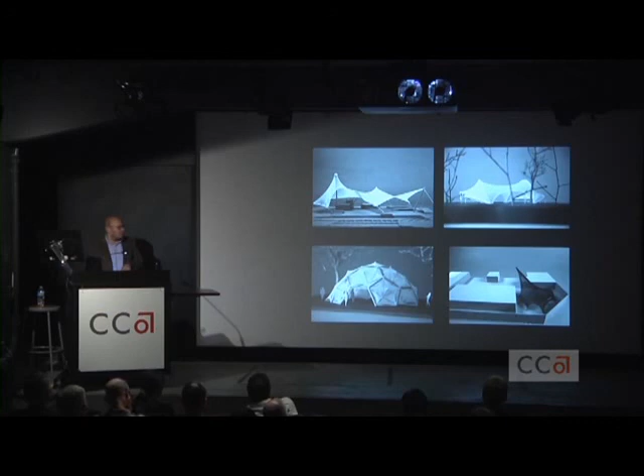This is also something that I've been running in my membrane structure seminar. So just really quickly, a couple of examples of proposals that my students have done through the years. Membrane structures are projects in which the behavioral properties of the materials become really, really important and often support the concept of a design. So just a series of projects. All these pictures were exposed at last year's exhibition faculty show at the Oakland campus, the CCA.

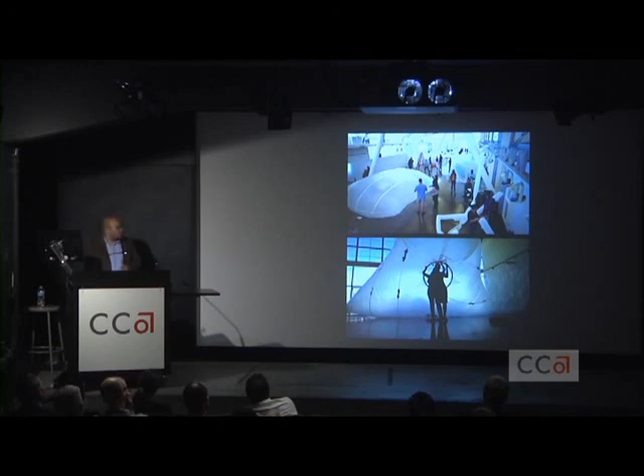I wanted to show you a couple of pictures of our design charrette. Again, in this case, we can see how architecture students really respond when you ask them to work directly with construction materials, no matter what they are, and you give them even a very short period of time to design, build, and erect something. This was a design charrette that lasted 3 days last fall. We gave students some translucent plastic and tape, and they were able to come up with really fascinating designs.

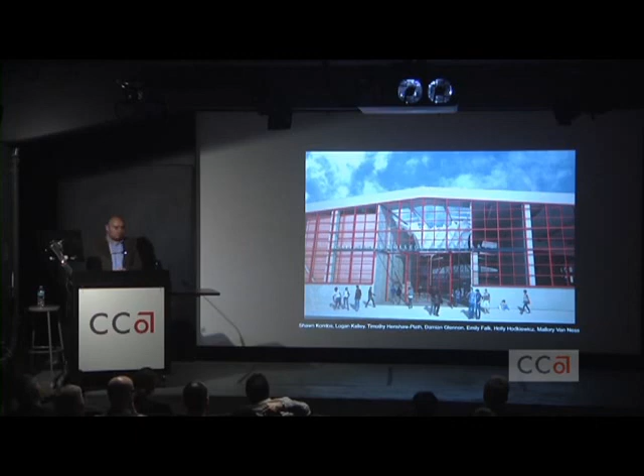And in my tensile membrane structure seminar, we're currently working - this is basically the final project - a proposal to cover the entrance courtyard of our building. We've been working together with management, the CCA, to actually build this tensile membrane structure. It's a cable structure with a tensile membrane structure on top.

So just to finalize, my teaching philosophy, my professional philosophy - the way I see architecture is not really about trying to transform architecture or the education of an architect into some kind of trade school by overemphasizing construction principles and ignoring other very important concepts and ideas. It's really about recognizing that architecture is still firmly anchored in material reality, and that the more we consider technical issues as part of a creative landscape, the more successful we could be. Thank you.